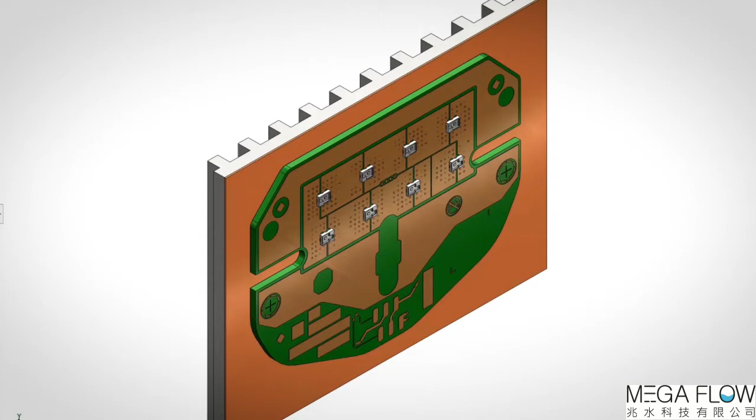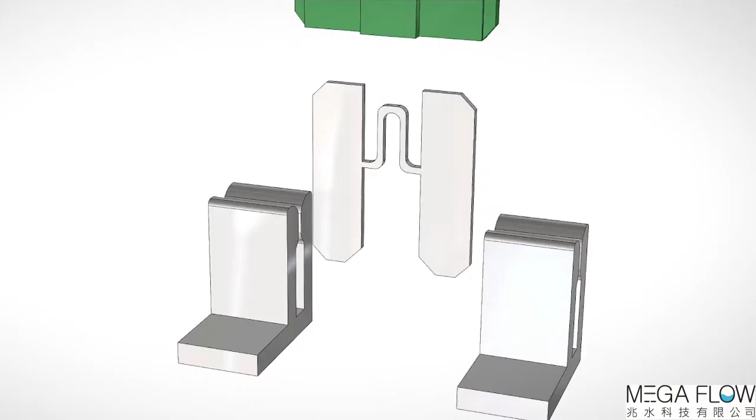My name is Georgi Chiriac. I'm a thermal design engineer and I work for Continental Automotive based in Iași, Romania. Since Continental is one of the biggest leaders in the automotive industry, we always want to improve our products and come with new products and technologies. So we always have a lot of challenges in trying to do all these things.

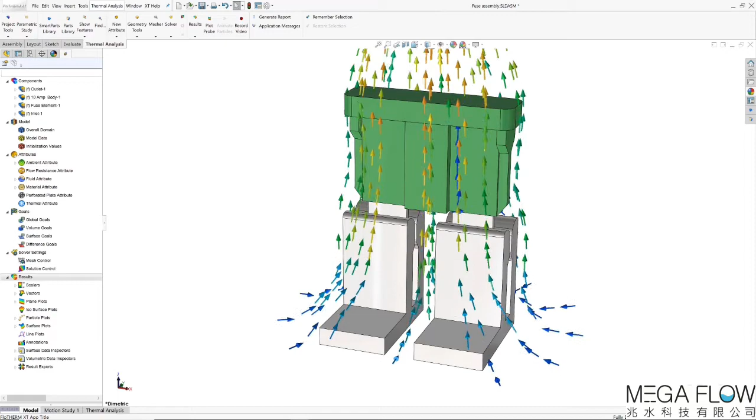We always try to simulate our products to improve them, to optimize them, and meet the requirements of our customers. It's very easy for us now to try to do more and more simulation tasks to try to eliminate all the problems that we have. Of course, every product has some good things and bad things, and we try to eliminate the worst things that can appear before reaching the production phase, as I said.

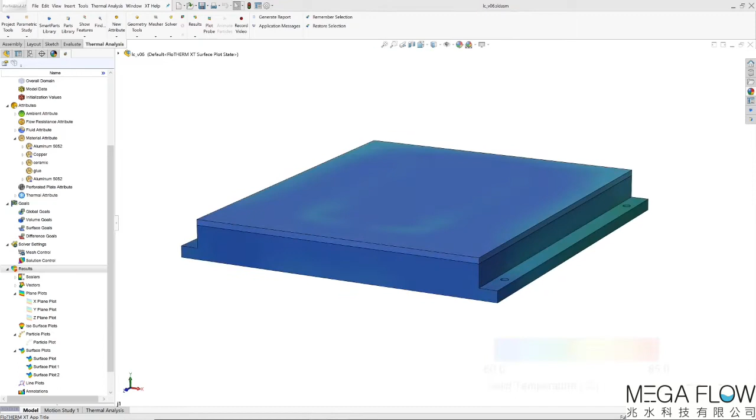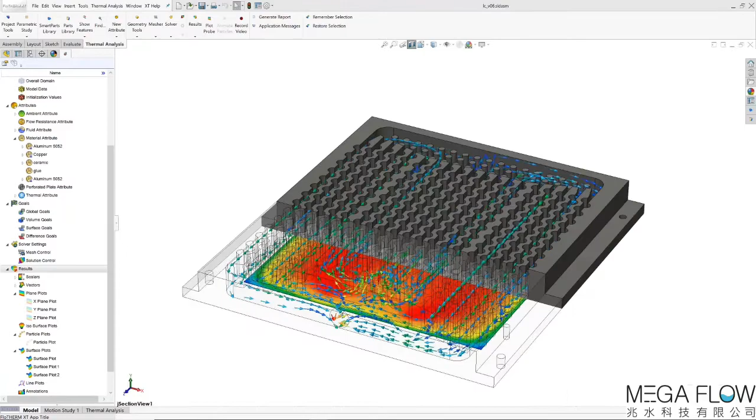I use Simcenter Flotherm and Flotherm XT. These are thermal simulation softwares, basically CFD, Computational Fluid Dynamics software. In my case, I use them for thermal simulation for electronic components and, of course, other Continental products based on our needs. And we mainly try to optimize our products from a thermal point of view. We try to cool them faster and easier and to have as low a working temperature as we can.

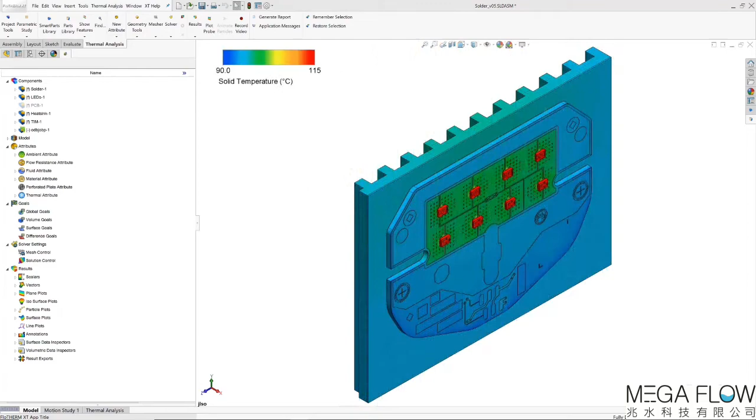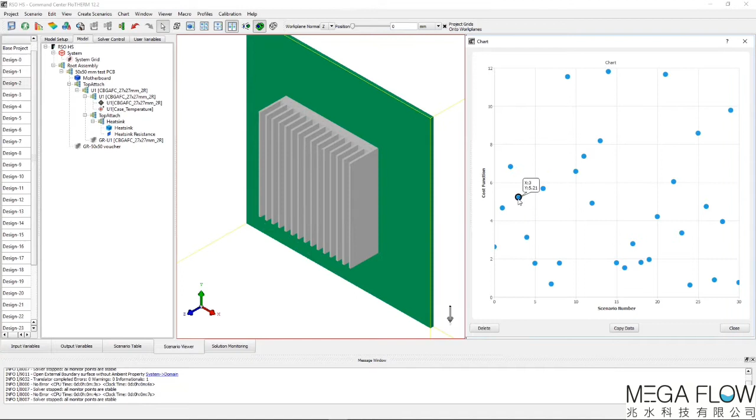What I like about Simcenter Flotherm and Flotherm XT, first of all, it's a very stable software. You can easily do thermal simulation without any problems. Another thing that I like is the user interface. It's very user-friendly, and especially for beginners, it's really easy to start working with Flotherm. And another thing, it's a very powerful software, and you can easily do simple simulation, but also you can go further and simulate complete and very big assemblies without any problem.

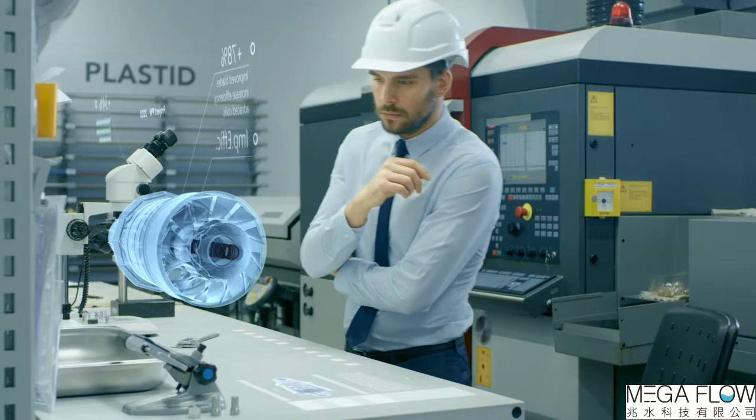In the last years, I saw a growth in the simulation area. We have more and more people that want to work in this field, and more people that ask us for simulations. So I think that all the engineers and all the companies want to include simulation in their development phases and to simulate all the products from the beginning. It's important to have reliable results, and when you actually get the product into production and you test it in the real world, the results should be as expected, not different.